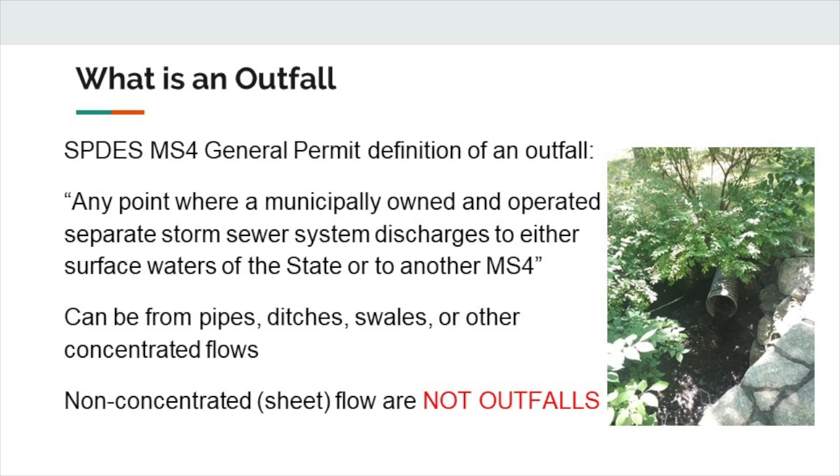And this could be from a pipe, a ditch, a swale, or any other concentrated flow. So things that aren't outfalls are when it's from a non-concentrated flow. We have, I think, a picture later on about a non-concentrated flow where something flows into something that's flat. So this is not an outfall, it's sort of a sheet flow. So an outfall is just one element of the stormwater system.

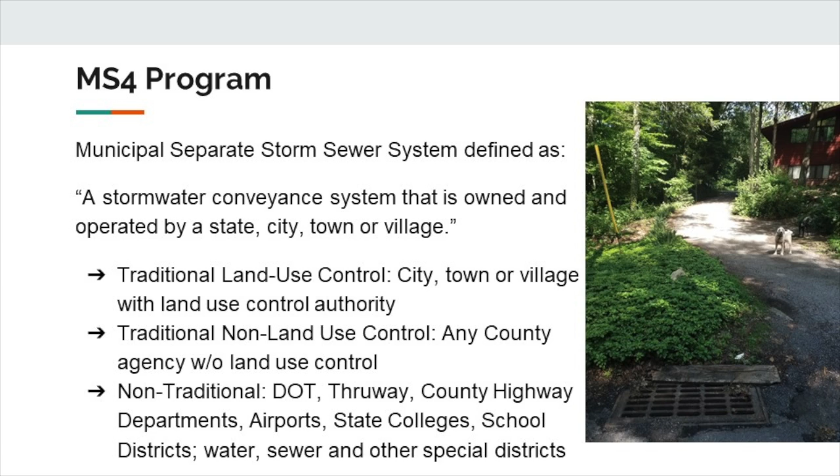So our town is designated as an MS4, which means we operate a system of stormwater conveyances. And there are many categories. Our town falls into the traditional land use control, where the town owns the land and operates the stormwater system on that land.

A little bit about the background of the establishment of this MS4 program: in 1987, the EPA decided that the Clean Water Act wasn't accurately managing stormwater outfalls, and stormwater in general. And so there were a series of laws that were passed to make requirements for outfalls and for mapping stormwater. And presently we have Article 17 of the Environmental Conservation Law that created the State Pollutant Discharge Elimination System Program, which Phil is going to talk a little bit about.

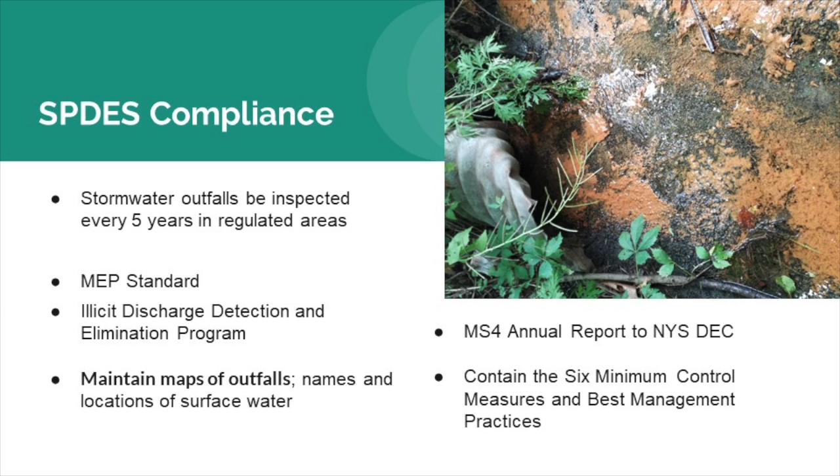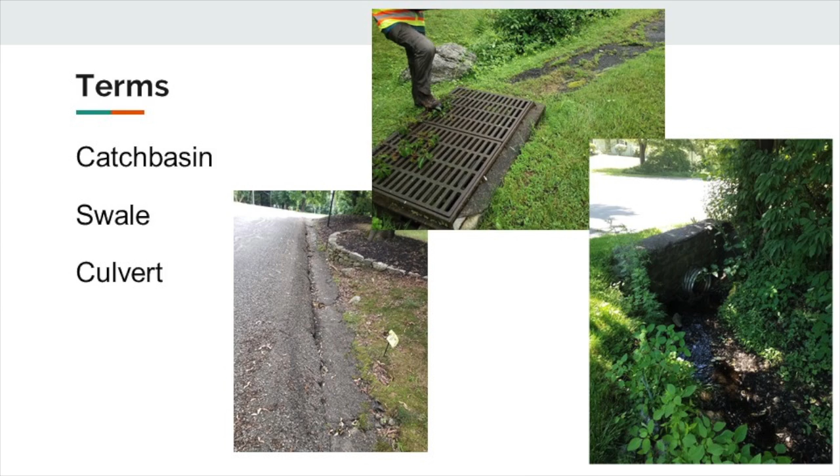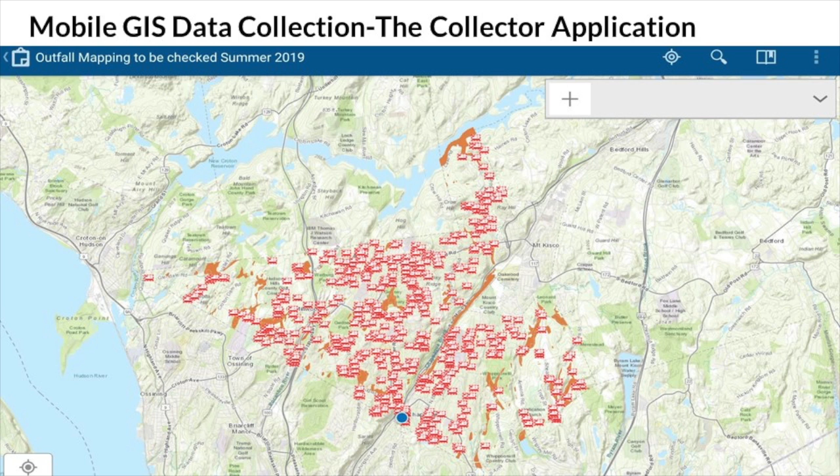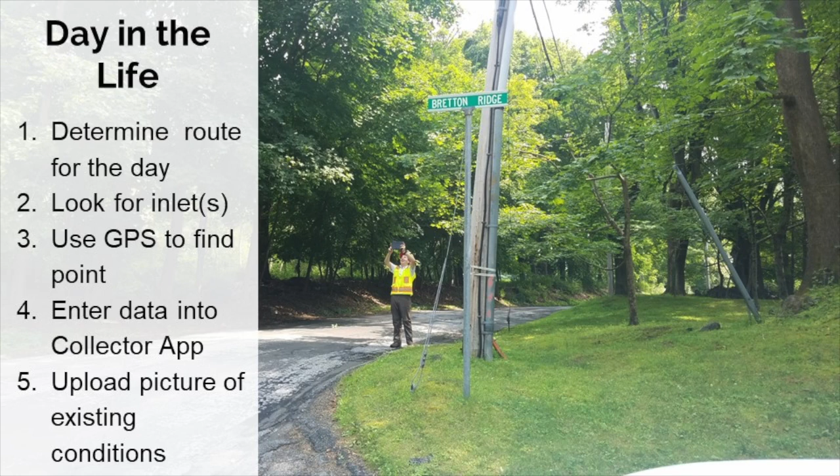So this is an example of the day in the life of a building intern. So this is Phil out in New Castle. Trying to get a signal. Yes, trying to get a signal. That's exactly what he's doing. We could only get signal right there for this whole area, so we just kept coming back.

So one of the things that we did before we started every day was we met with Kellen in the morning and we discussed where we were going to go. We have this big map that we have out on the table, and we fold it in many different ways, so it's seen better days now. And we kind of planned out where we were going to go. That way we weren't driving to one part of the town, going to another, and just going back and forth.

So once we determined that, and Kellen knew where we were going, we were all safe, we had our vests, we went out in the town cars, and we went to the different locations. When we got to a location, we usually looked for an inlet first. Most often it was a catch basin that we were looking for. And in a catch basin, you can usually see the pipe that we're actually looking for, so the actual outfall.

So often we would do a combination of looking for the pipe and kind of following where the pipe would go visually, and using the tablet. So we were able to kind of zoom in on one of those red points and follow where we were supposed to go using GPS.

So once we got to the point, or if there was too much vegetation, we couldn't get there for some reason, we would enter the data into the Collector app, which is what Phil was talking about before. And we would upload a picture. That way later when Kellen or Terry or whoever is looking at it can see what we saw and see the condition if our description is not good enough.

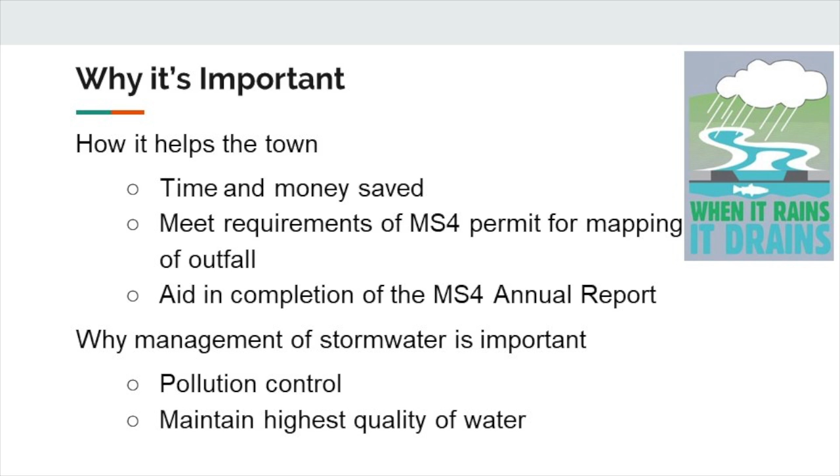So why is this important? Why would we spend 6 weeks on this? Or actually more like 5 that we were out in the field. I'm sure many of you don't get the chance to just sit and work on one project for 6 weeks, but we did. So it saves the town a lot of time and money, and it also helps meet the requirements that Phil was talking about with the mapping that is required under MS4 and SPDES, and also aids in the annual report that the town has to make. And in general, managing stormwater is important because it helps us control pollution and maintain the highest quality of water in the town, and for all of New York State.

Alright, let's play a game. He's on vacation. Yeah, Terry's not here. So we're going to show you a series of pictures. There might be some descriptions, and you guys have to determine if it is or if it's not an outfall. Kellen and Terry may not answer. Or Bob. If I don't know it by now, I'm in the wrong business.

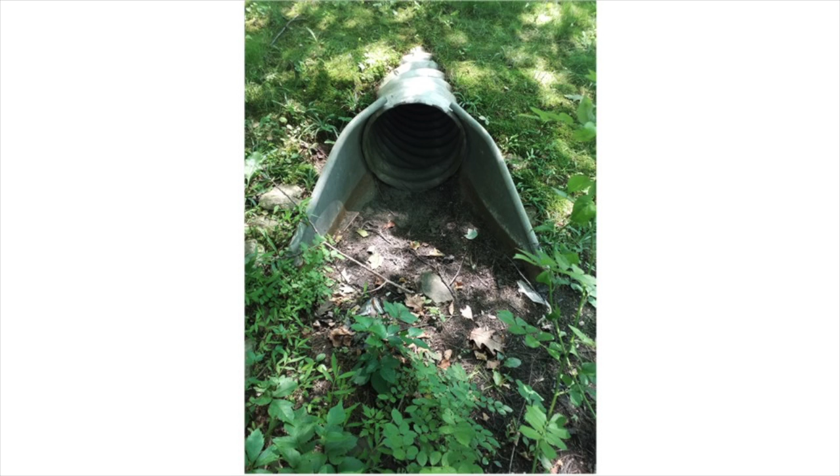So here's the first one. So this is the pipe, and this is what it's discharging into. It was said it was an outfall on here. Yeah, so all these pictures are places that, when we looked at that map and on the tablet, say that they're outfalls. So then we would show up and go, huh, is it? We always run down, what do we know? That's Phil's biggest thing. So you can play, what do you know about this? These are not actors, folks. This is real field stuff.

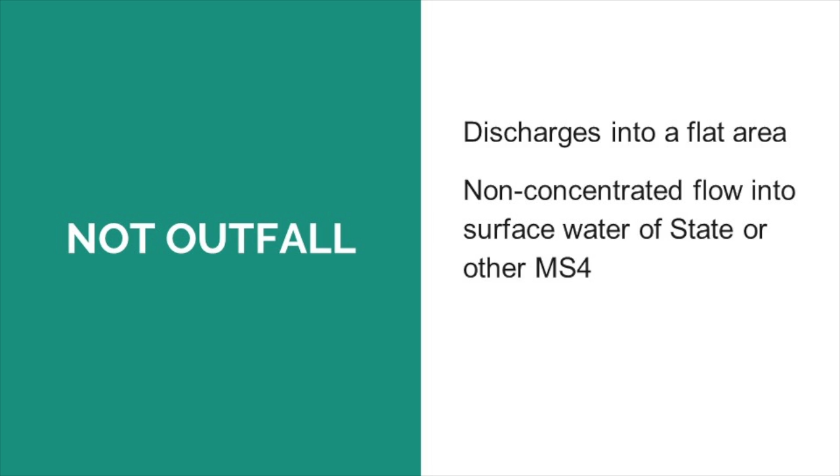Alright, anyone have guesses, any thoughts? That's falling in the dirt. That does look like dirt. Not all at once. We'll say no. Alright. It's not falling into any waterway. It's gotta go into water. It is not an outfall. So this is what I was talking about with the sort of non-concentrated sheet flow. You see it's kind of flat and just goes into not really a ditch or a body of water. So it's not an outfall.

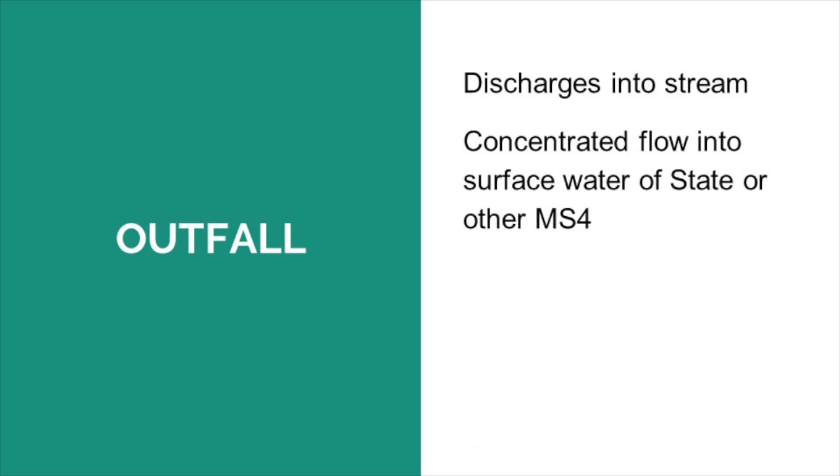So this bonus pipe, if you were there, like Phil and I were, you would know that there's a road here, and on the other side there's this same stream and a pipe that looks just like that pipe, and water's flowing into it over there, and water's flowing out of it over here. So what do we think about this guy right over here? That's a yes. What about the bonus pipe? No.

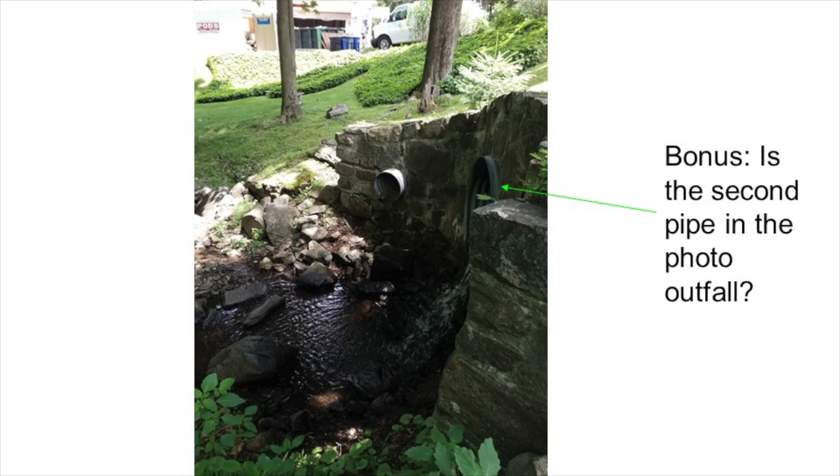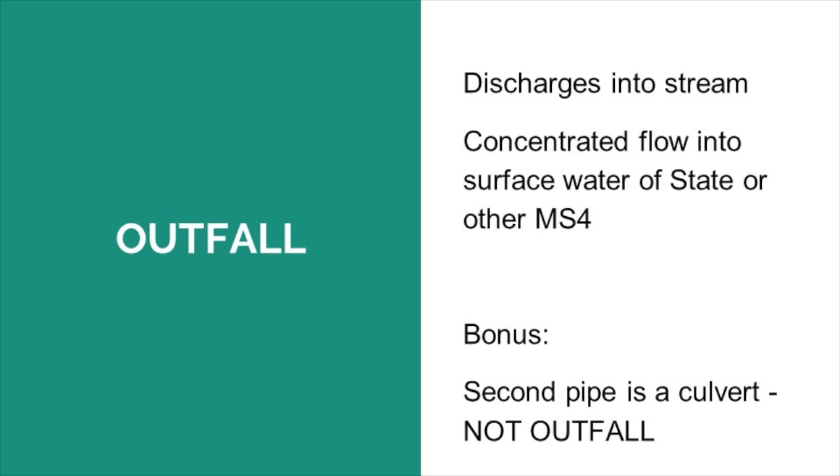No. It's a trick question, is that what it is? I think it's a no. I'll second the no. All right. So that second pipe is an example of a culvert. So that stream is moving underneath that road. But that other pipe that you saw is the outfall. Oh, so the stream course was going through the second pipe, and the first one was contributing additional fluids? Yes. Okay, got it.

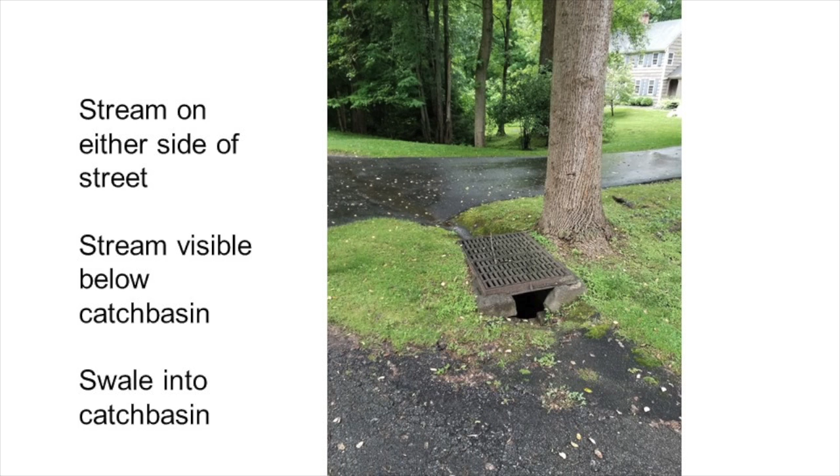Right, this is the last one. A little tricky. So this is an example of a swale. It's a man-made ditch. And here's the catch basin, and there's actually a stream directly under this catch basin. So if you were to stand on the catch basin and look down, you would see a stream flowing right underneath you. And there's 2 entry points in between the swale there.

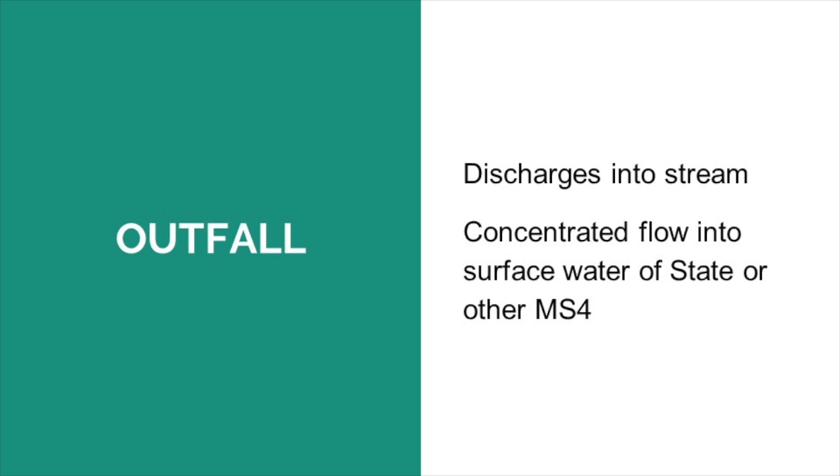Outfall or not? Yes. You're treating it. When I think of water being treated and then solids going down, aqueous going out, where does it go out of? You're directing it, controlling it, engineering it, I think of it as an outfall. That's right. That was one of the trickier ones that Phil and I stood out there and then later asked Kellen about.

I think your first photo was like lottery winning, because to be in New Castle and to direct water so that it accumulates in an area and it is not forming anything that resembles a wetland, in a town that had a lot of its construction probably historically over wetlands, that's like a portal to another dimension, where that water's going. It just seems remarkable to me.

Great. Good job, guys. Very impressive. Well done. Does anyone have any questions? So when you go back to school and they ask you what you did for your summer vacation, what are you going to tell them? Long answer, definitely.

How much of the town did you do? We did the whole town. All those red dots, over 500. That's an enormous undertaking. We finished two weeks ago. So out of the 500 dots, how many were outfalls versus how many were not? Do you recall? Definitely over half. We didn't keep track as we were going, and to do so, at least as far as what we know how to use of the app, we'd have to go back and click on each point and see what our remarks were. So probably at least half.

There were also a good amount that when we got there, it was so vegetated that we couldn't see anything or we couldn't locate a pipe. So we have our remarks all listed out and a key for what our remarks mean, whether or not we saw an inlet but couldn't find where the actual pipe was. I'd say probably about half of them are ones that we actually physically saw and said, yes, that is.